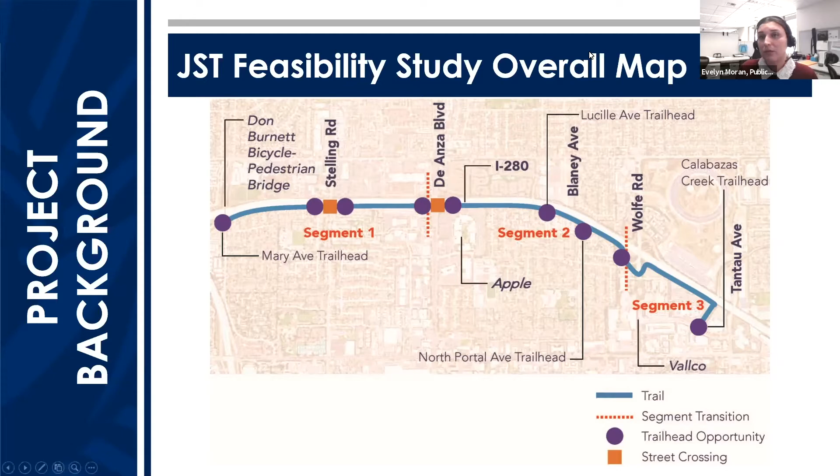Alternative 1 of the feasibility study: the trail alignment cost matrix in the feasibility study allowed decision makers to see various estimates for each alternative. The city selected alternative 1 because it was financially rational, and in December of 2018, the Bicycle Pedestrian Committee endorsed this alternative.

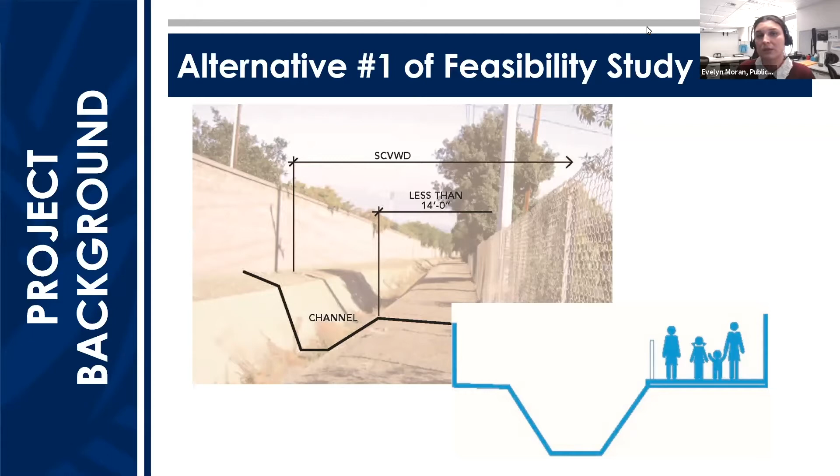The JST Central and JST East: the city decided to initiate the project with the east and central segments first because they posed the fewest engineering challenges and felt that the east and central segments would generate higher usage from commuters and residents. The east and central segments of JST are eligible for Measure B funding grant administered by the VTA.

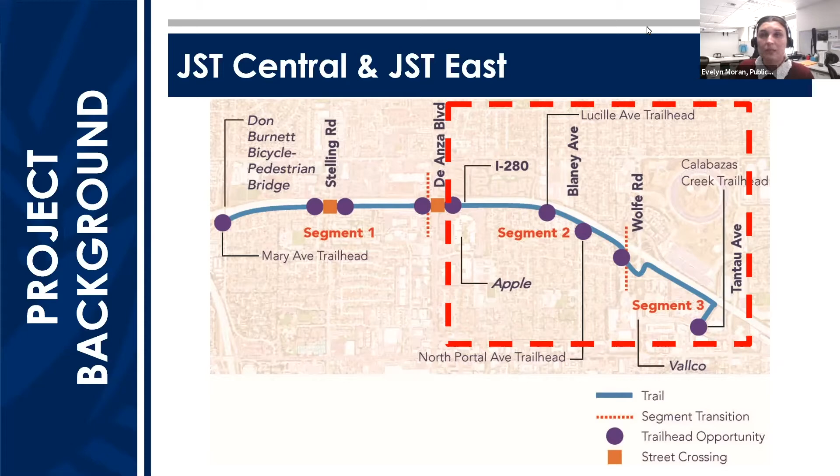Information gathering and concept phase: getting to this point in the project started in July 2020 when the design team was selected from a pool of qualified candidates via an RFQ. Then the survey and site inventory for the East and Central were collected between December 2020 to February 2021. During the months from March to May of this year, the concept design for the East and Central was developed.

We have 3 community meetings to provide input. Tonight, we will focus on residents in proximity to the central segment, and in the May 27th meeting, focus will be on citywide input.

Refinement and construction phase: from summer 2021 to 2022, the design team will analyze the community input gathered and refine the design. In fall 2021, we will have a community meeting. Council must authorize the construction award, so the earliest date construction could start would be fall 2022 for the east segment. In early 2023, the East Trail opens and the central segment development begins.

Now the design team will walk through the existing conditions and concept plans.

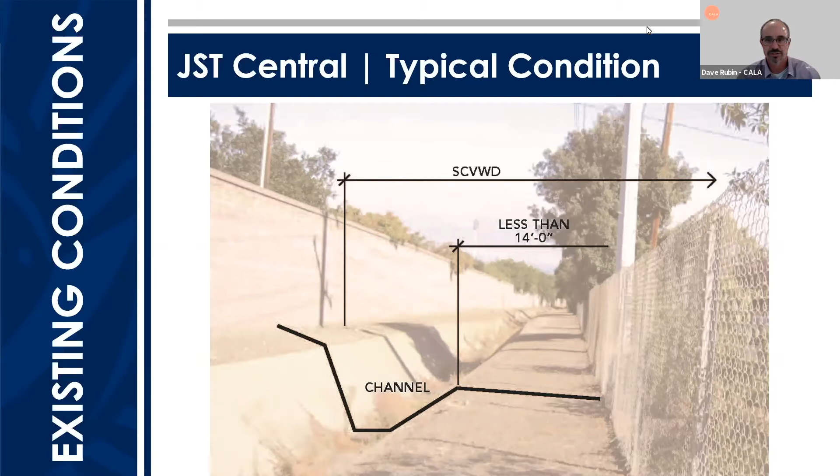Thanks, Evelyn. For starters, I wanted to walk you through the existing conditions of the corridor. This first image shows a typical condition within the central segment. As you can see, the channel in this section is lined with concrete throughout the segment, and the distance between the top of the channel edge and the fence varies throughout, in some instances 8 feet and all the way up to 14 feet.

Here are some images of the various conditions in the central segment. The upper left image shows the bend in North Blaney Avenue, where it meets the proposed trail, and that's Lucille Avenue in the distance. The other images show the existing maintenance road next to the concrete lined channel.

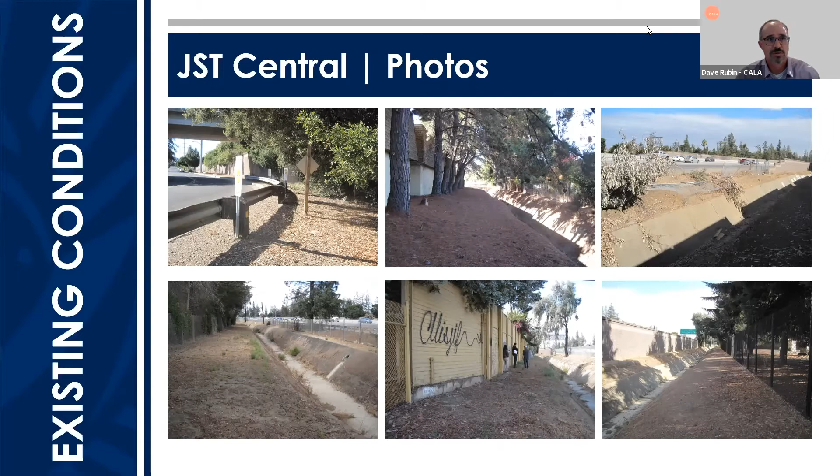In contrast to the central segment, the east segment is generally a little bit wider, and the channel in this segment is unlined, meaning no concrete. In many areas, the distance between the top of the channel edge and the fence is 14 feet or more.

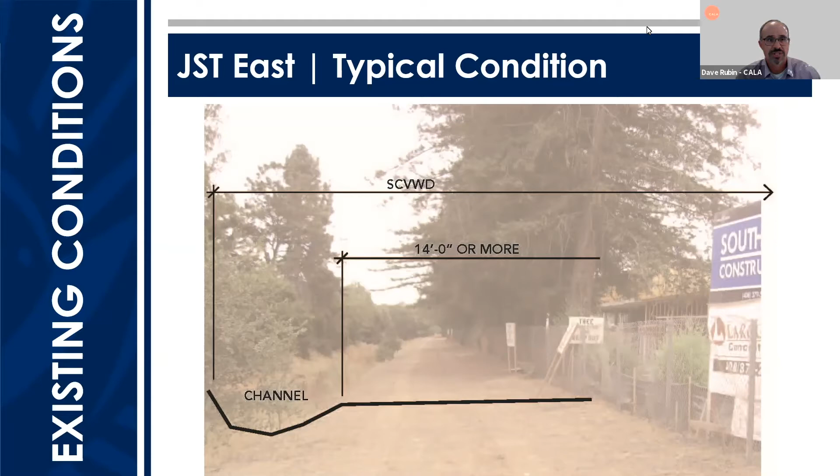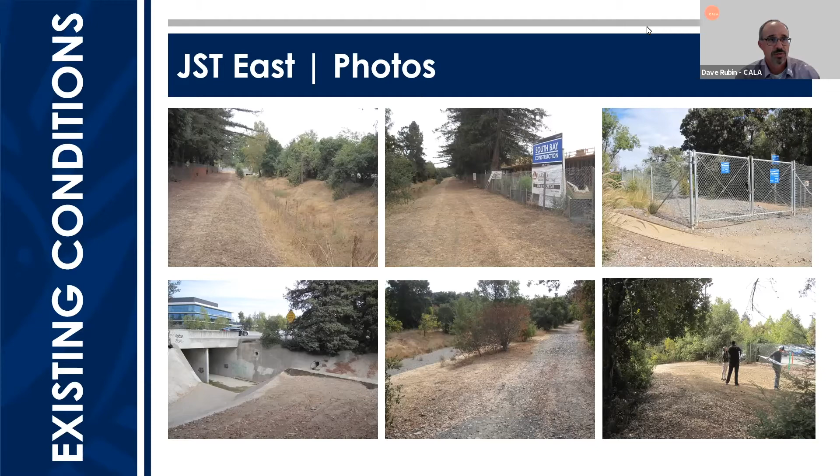Here you can see the unlined channel and the generally wider maintenance road alongside it. The east segment is also where the confluence of the channel and Calabasas Creek occurs. You can see that condition in the lower left image. The proposed trail then runs south adjacent to Calabasas Creek all the way to Vallco Parkway.

At this point, I wanted to walk you through the trail concept, including review of the trail alignment, proposed trailhead locations in both the central and east segments, as well as trail cross sections.

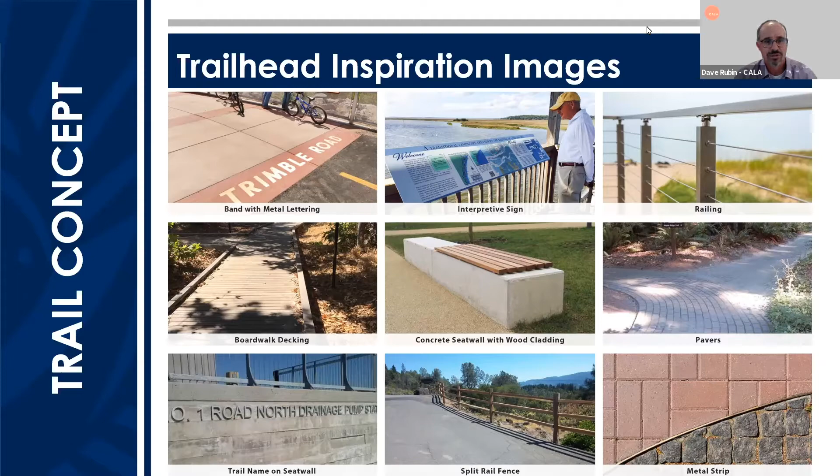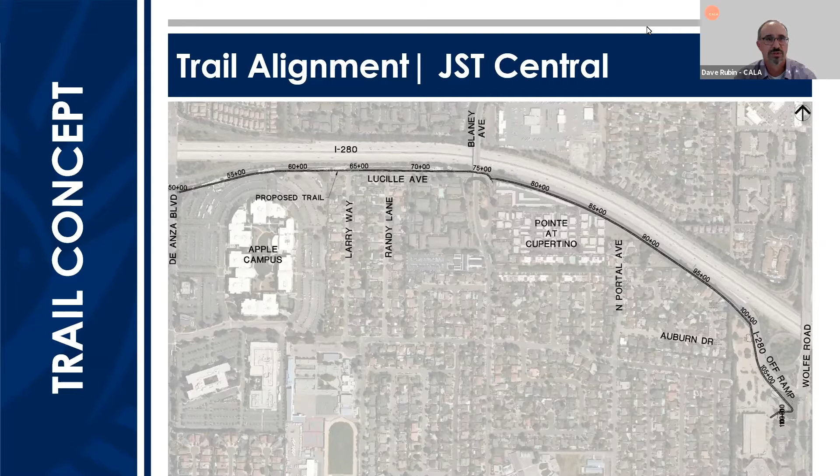Starting with the central segment, going from west to east, this segment starts at De Anza Blvd on the west and ends at Wolfe Road on the east. The west segment is not being designed at this time, but the intent is that it would continue west from De Anza Blvd all the way to Mary Avenue.

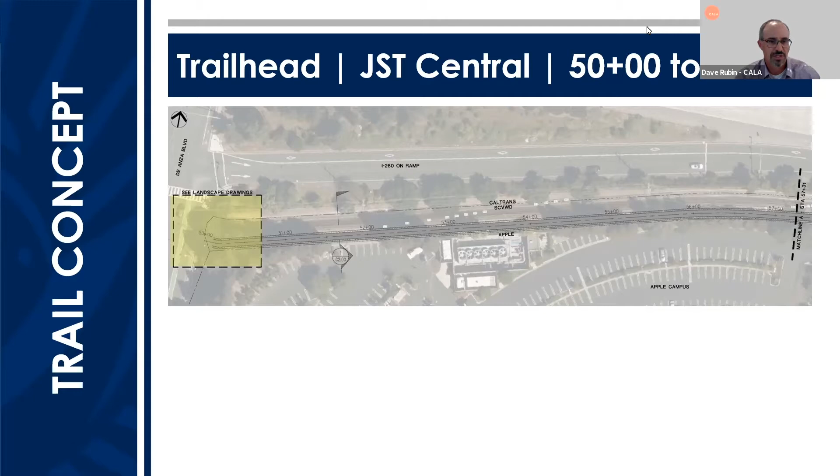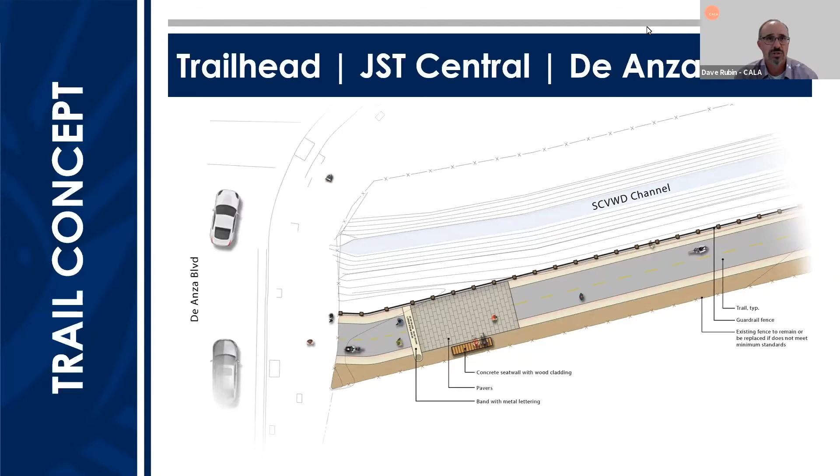The first trailhead opportunity occurs on the east side of De Anza Blvd, where you see the yellow box on the screen. At this location, there would be a small trailhead with concrete seat wall and pavers. Each trailhead we're going to present this evening has a concrete band indicating where you are in the world, with latitude and longitude as well as elevation indicated on that band.

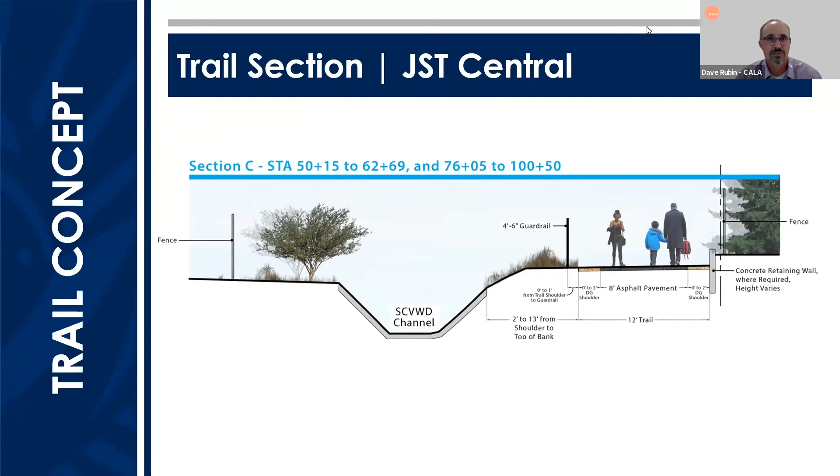Here's a typical cross section through this portion of the trail. The paved trail surface is 8 feet wide with 2 foot wide decomposed granite shoulders on both sides where space permits. In all cases where we're adjacent to the open concrete lined channel, we're also proposing a guardrail.

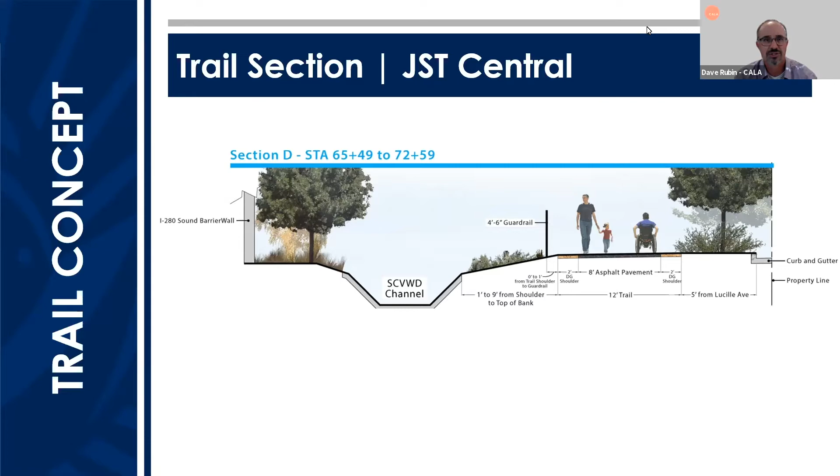At this point, I want to turn it over to Kwong with BKF to talk a little bit about the bend at North Blaney Avenue and how the trail interacts with that.

Okay, maybe we lost Kwong. I think we have some audio issues with Kwong. So I'm going to continue here.

So we'll talk a little bit about the trailhead at Lucille. This trailhead is proposed near the corner of Lucille Avenue and Villa de Anza Avenue, just west of the Blaney Avenue overcrossing. This trailhead provides seating, pavers, landscape improvements, an interpretive sign, and a new crosswalk promoting safer access from the neighborhoods to the south.

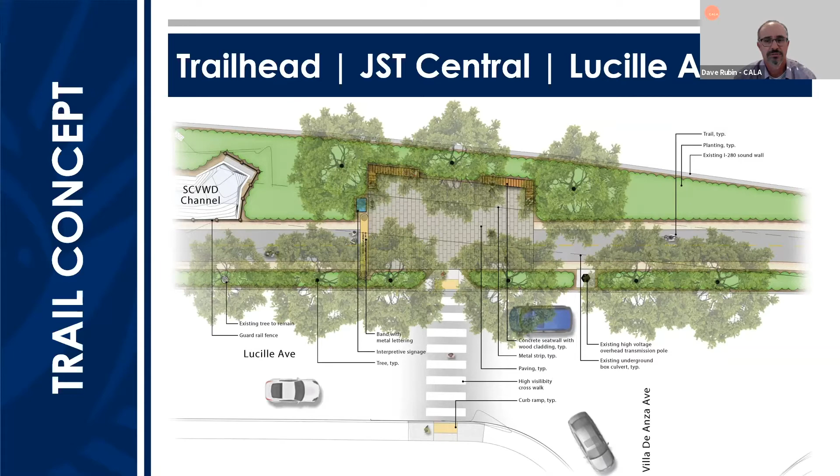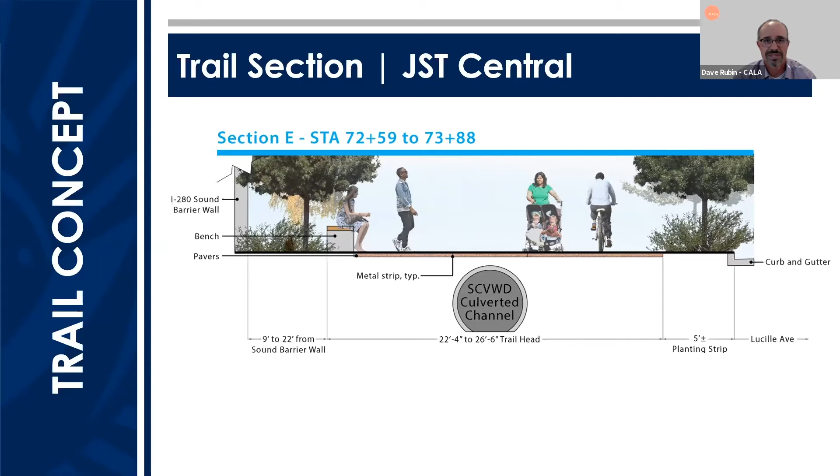This is a visual simulation that shows how that trailhead relates to the trail as it passes through east-west, and also how it relates to Lucille Avenue, the crosswalk that crosses Lucille Avenue, as well as the Interstate 280 sound wall beyond.

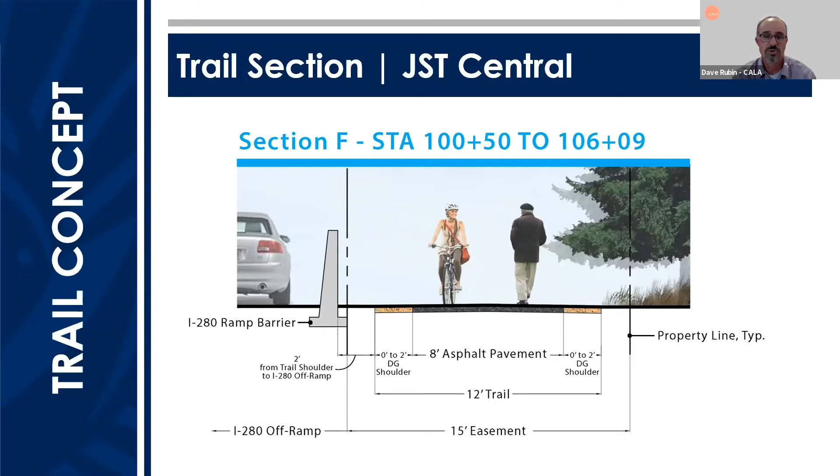Moving eastward towards Wolfe Road, this cross-section illustrates the condition where the trail is immediately adjacent to the southbound 280 off-ramp at Wolfe Road. The trail is immediately next to that off-ramp within a 15-foot wide easement, adjacent to the new development at Vallco.

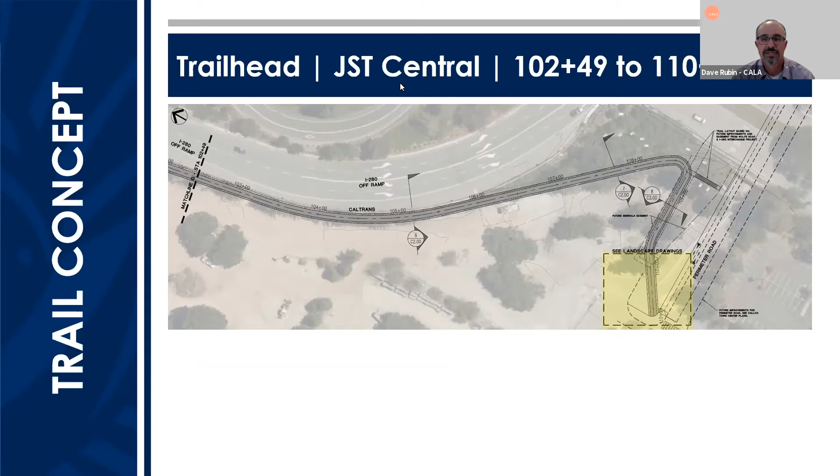This is showing in plan view the trail alignment as it approaches Perimeter Road. You can also see there is a planned trail spur connection to Wolfe Road from the trail, as well as stairs down to Perimeter Road.

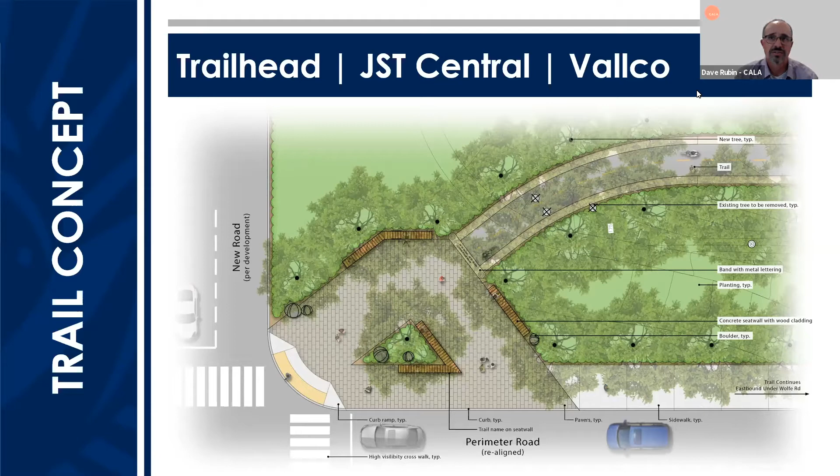So this is the planned trailhead at Vallco. This would provide a connection to the future development at Vallco, and trail users can continue eastbound under Wolfe Road and on to the east segment. The trailhead also provides seating, pavers, and landscape improvements.

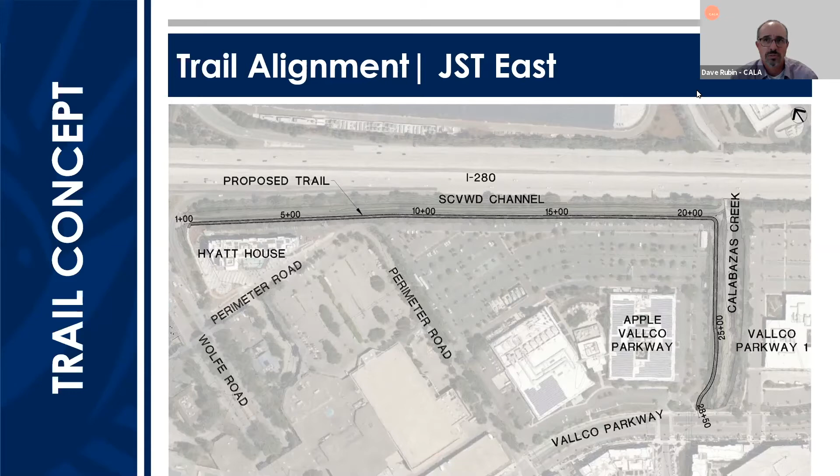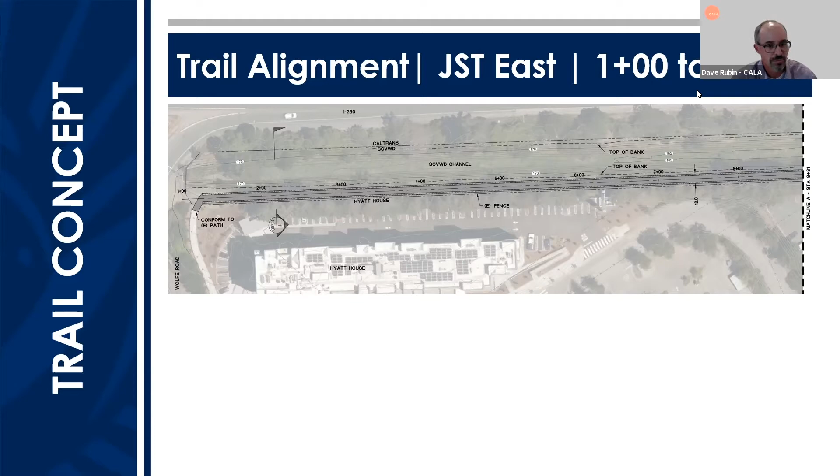Now talking about the east segment, again starting from west to east, this starts at Wolfe Road at the Hyatt House Hotel, and then it would finish at Vallco Parkway immediately adjacent to Calabazas Creek. We do have a connection behind Hyatt House. Hyatt House constructed a pathway as part of their development, and so there would be a connection that our trail would make there, and that comes all the way down to Perimeter Road.

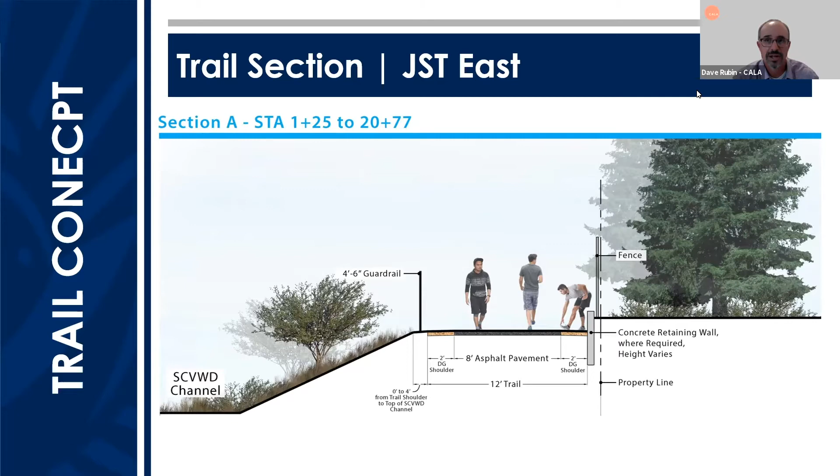This is just a typical section behind the Apple campus. Again, the trail here has an 8-foot wide paved section with 2-foot wide decomposed granite shoulders. In some areas, a low retaining curb or wall may be needed to create a level area for a trail, and that's indicated in that cross section.

Where the channel meets Calabazas Creek, the trail turns to the south and creates a great trailhead opportunity. We've called it the promontory. It provides a good observation point of the confluence of Calabazas Creek and the channel.

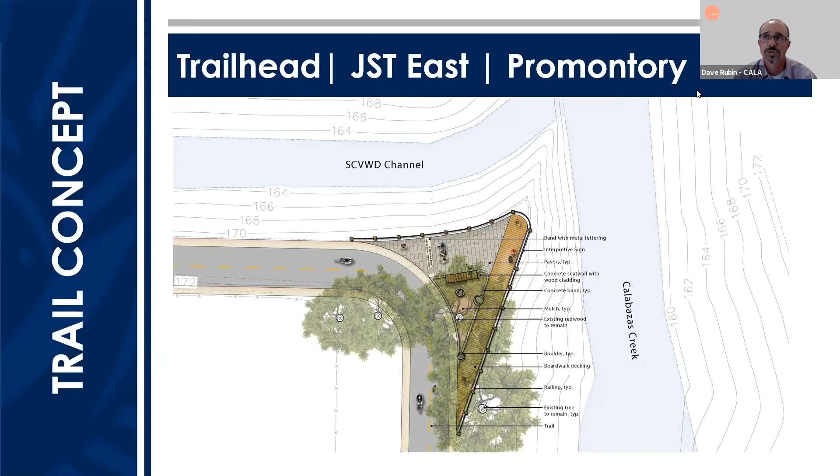Decking is proposed along the creek side of the trailhead with pavers elsewhere. Seating is provided beneath some large existing redwoods, and an interpretive sign is proposed on the railing overlooking the creek, talking about the flora and fauna of Calabazas Creek.

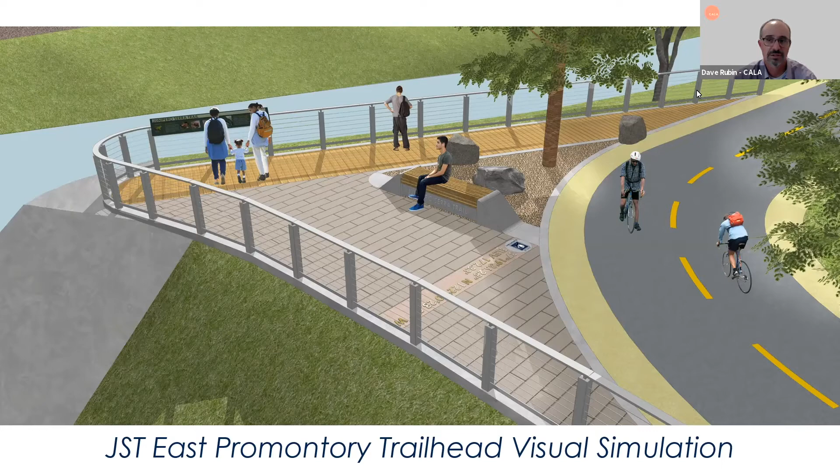Here's a visual simulation of how that might look. This is looking towards Calabazas Creek, and you can see on the right-hand side the bend of the trail as it's heading towards Vallco Parkway, off to the upper right corner of that image.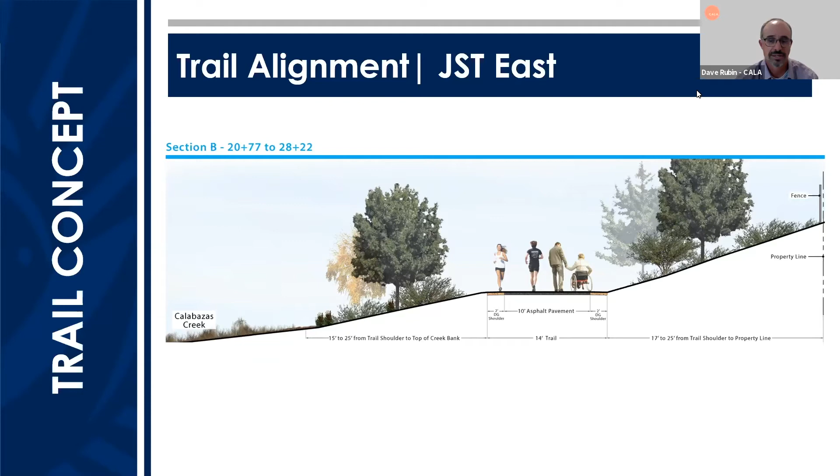Here's a cross section as we're approaching Vallco Parkway, where the trail is immediately adjacent to Calabazas Creek. So we have more space available here, and the trail widens along the creek. The paved portion is 10 feet wide with two 2-foot wide decomposed granite shoulders for a total width of 14 feet. At this location, no guardrail is proposed between the trail and the creek, as the slopes are gentler and the distance to the creek is further.

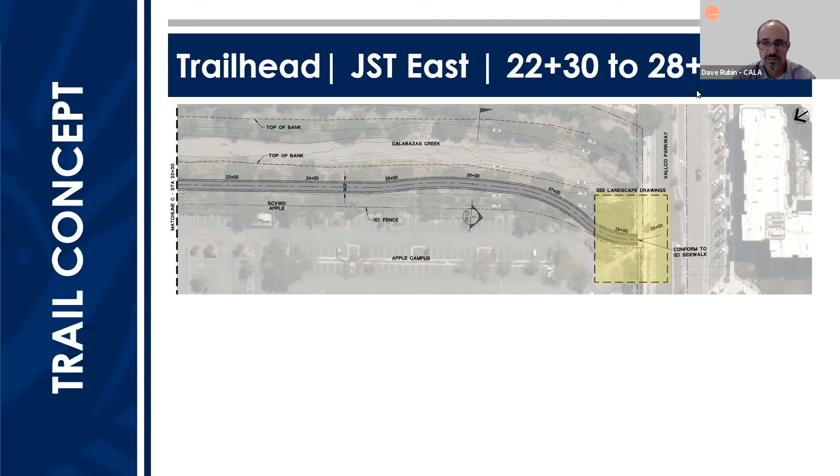Our trail terminus at the east segment is in that yellow box, at Vallco Parkway. This trailhead directs trail users to the signalized intersection at Main Street and Vallco Parkway, and also ties into the existing sidewalk that fronts the Apple campus at this location. There would also be seating and landscape improvements proposed for this trailhead.

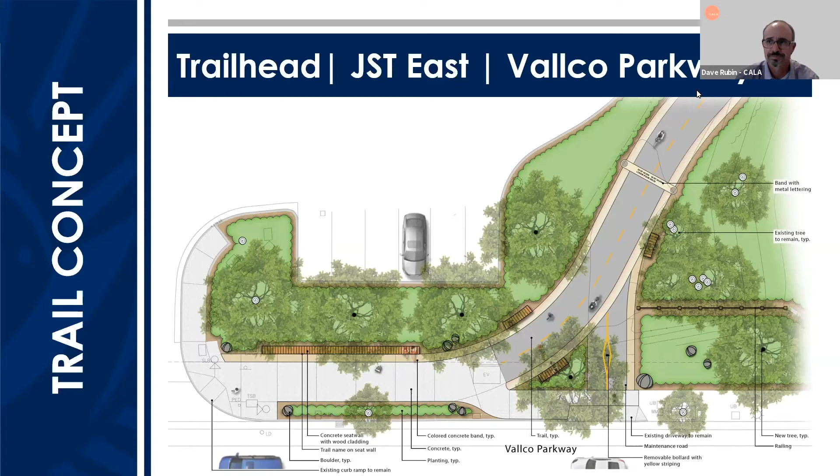Okay, so I wanted to transition from the trail concept to talk a little bit about safety and privacy concerns for both trail users and adjacent residents.

Additionally, depending on need, the city would also evaluate a trail patrol program should that need arise.

Another notion is the idea of milestone markers along the trail. These can be a good tool for emergency response. Calling 911 and giving the dispatcher a milestone marker location gives first responders a quick way to find someone on the trail that might be in distress.

Generally, lighting is not planned to be a component of the project. The trail will be open from dawn to dusk as a matter of policy. To assist trail commuters in winter months, some low-level lighting may be considered at a few of the trailheads just to aid in wayfinding and being safe at trail crossings and nodes.

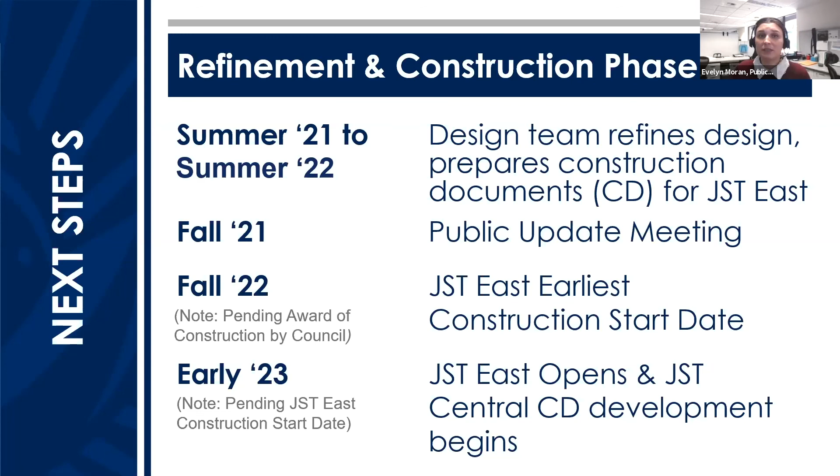Next steps, the refinement and construction phase: for summer 2021 to 2022, the design team will analyze the community input gathered and refine the design. In fall 2021, we'll have a community meeting. Council must authorize the construction award and the funds for it. The earliest date construction could start is fall 2022 for the east segment. We anticipate early 2023 for the East Trail to open, and then the central segment development begins.